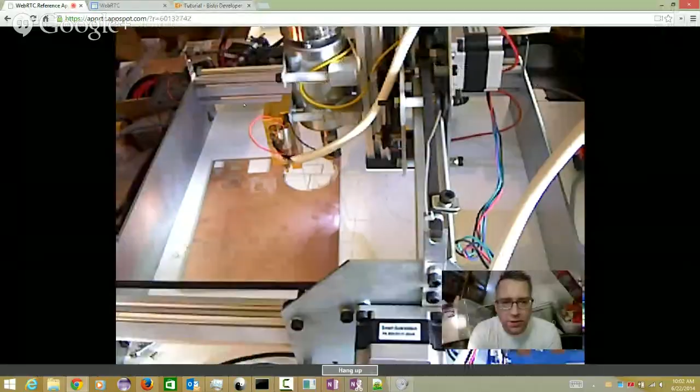Before we connected, I was trying to get this WebRTC live streaming video going so I could watch my CNC device in the ChiliPeppr view. Oh, sweet. Nice. That's looking pretty easy to do. So it'd be kind of sweet. I've got a USB microscope hooked up to it as well. You can see this is the machine that I've got hooked up to it right now.

Oh, cool. Whose 3D printer is that? It's a CNC machine. It's an Othermill. Oh, yeah. That's the one that's got the TinyG embedded in it, right? Yeah. I use that because they had all of the limit switches and whatnot already put in there. Nice. So they may actually appreciate this ChiliPeppr project. Yeah, the app that they write only works with Mac. Yeah, that's the thing. Why are people doing desktop apps still? Unless they didn't think the browser could handle this. I think the browser does a better job than a desktop app.

The only thing I'm really curious about is these faster machines. This is pretty slow right here. It's great for what it does, but even like the Shapeoko, or the 3D printer that I made, I can get it going at like 55,000 millimeters a minute. That's huge, really fast. So you're saying it's going to starve the planner buffer. It could. I don't know. I'm curious to see.

But you know what you could do? This is the perfect thing for this video on how to extend, because you could be sending blocks of like 40 lines at a time instead of what I'm doing, which is just piecemealing it. And I add like a 100 millisecond delay between each line. Oh yeah, we got to get rid of that. Because the one thing about JavaScript, or at least the way I wrote it, is that it's event based and it's one thread. So you almost have to give it time to process other events.

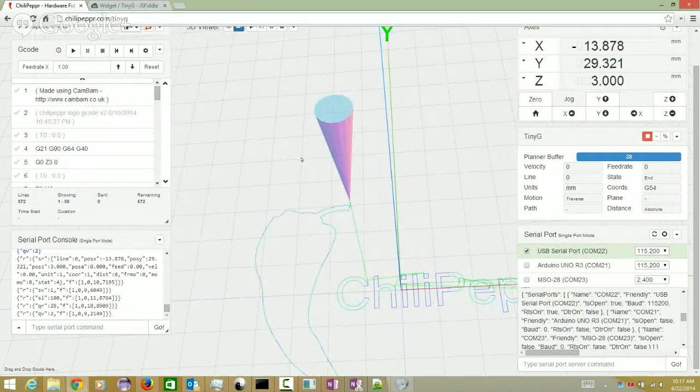Hey, I'm back, John. Okay, yeah, I'm back. Hey, cool.

So yeah, you're absolutely right. You're at the operating system's mercy, which is kind of cool and kind of terrible. Kind of cool because you're not going to overflow the buffer. Kind of terrible because you lose the ability to pause and resume. So it would be interesting to pull that 100 out and just say send the file. Don't do anything. We'll lose the ability to pause, but that's what the QRs are supposed to be for.

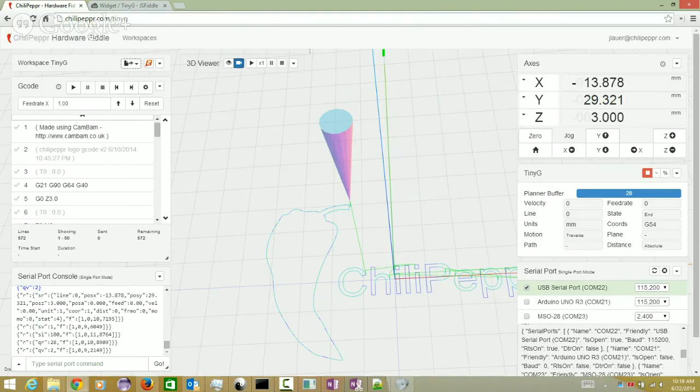Right. So basically, it will never be any more than whatever our high water buffer is, like 18 moves into the planner or so, before we're going to do a pause, which is emergency stop and all that stuff. There is no such thing. It's actually just stop. Emergency stop is always just to hit the power to the motors, right? Right. Which we've all done.

Right. Well, I feel like maybe that's more of the design decision you guys have to make for the TinyG itself. I'm just going to work with whatever you make available, and I do think the planner buffer is pretty good, and I feel like you could do a little bit more intelligence on the G code sender. I've got to do something anyway, or maybe somebody else will, where they analyze each line of code and see how far the movement is to estimate the duration of the job, and you really have to do an estimate per line.

And not even that. It's about velocities too. Well, but that would be part of the estimation, right? If you're doing a 100 millimeter move at a 10,000 millimeter feed rate, it's going to go really quick versus a 30 millimeter rate. But you're still getting drift on that, because it's a lot harder than you think, because you have to take into account your maximum jerk and your acceleration and deceleration settings. You could estimate that part. You could, but it's not going to be exact. And if you have a 2-hour job, you're going to be off by quite a bit at the end.

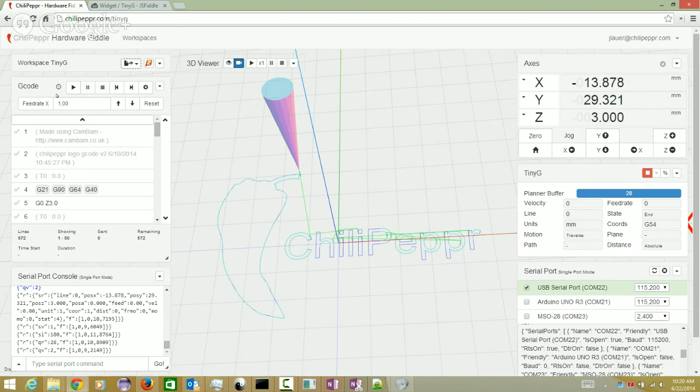You will, but I do think it could be enough to make you decide in the code to send a block of 5 lines or 10 lines instead of just 1 line. How would that influence how many you sent? I'm only sending one at a time with that 100 millisecond delay. But why do we care at all about the size or whatever? Why wouldn't we just go by the planner? I think it's still in tandem, but if I run this job right now, you'll notice here. I'm going to go ahead and run it.

So notice the planner buffer's down at 11. Are you seeing that? I am, yeah. Okay, these moves, when I'm in G2, G3 moves, those are chewing up a lot of the planner buffer from 1 line of G code being sent. So I'm actually okay on those. When I have these long, straight G1 moves, I could feed more data into the planner buffer to just queue it up.

It's funny, this bar has an animation attached to it, and the animation is not running because there's too much processing going on because of this Google Hangout. Let me turn off this console just to save some processing.

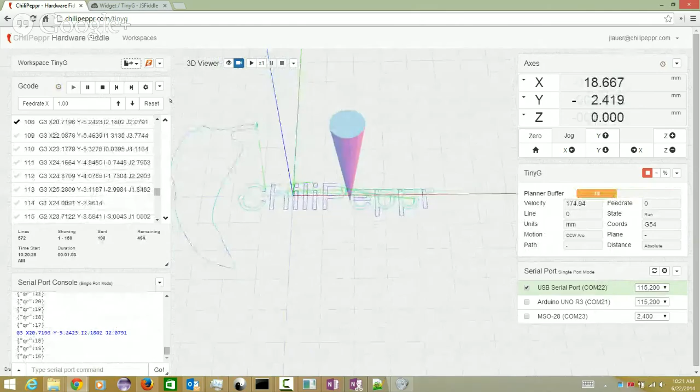But when I get over into this actual ChiliPeppr section, I have a ton of those short moves. And I end up with the planner buffer lingering around 26. I'm not sending enough to it. That's because your 100 milliseconds is delaying you. It's too slow then, right? Right. So that's what I was trying to say, that's going to get you. But I could send 5 blocks of data when I'm in that section of G code. Whereas this section, I think I'm fine. I mean, it works pretty well.

So I guess maybe you don't agree, and this is why we're having this talk here. But anytime we're doing anything with delay, we've already lost, because delay is kind of a band-aid in my opinion. That's kind of the way I looked at it when I started doing this.

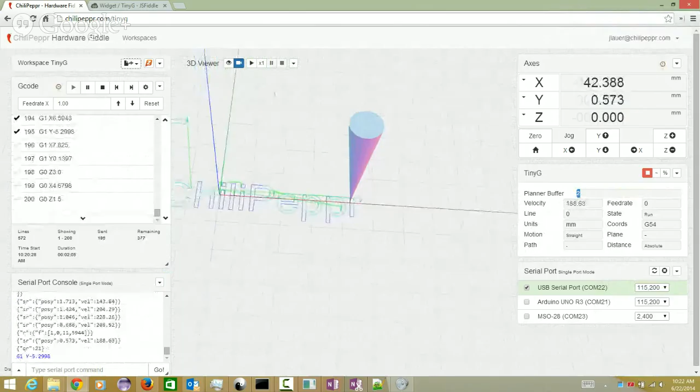Also, one little comment I'd throw in here: I've taken notes about what we need to work on, which would be to be able to tell when you're actually connected versus pseudo connected. You know what I mean? Because your test serial port console runs a lot of the time, and you see stuff happening, but I think the average user doesn't know it's not connected. He says send line, and it just doesn't. There needs to be a better, clear indicator that it actually works.

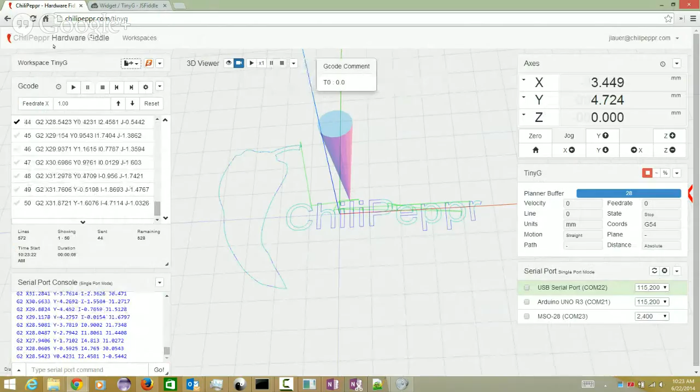You know what? It does throw up an error though, on that note. So if I disconnect. Right, but now click the 3D viewer and click play. I mean, of course it's playing the commands, but there it is: we couldn't find the serial port you're trying to write to. Right, but I'm still writing a whole bunch of lines, and I'm like, oh, it should be working. What's going on here? Yeah. It's just a little confusing. I know that you get it, and I know that I get it now. I'm just telling you what I got confused with.

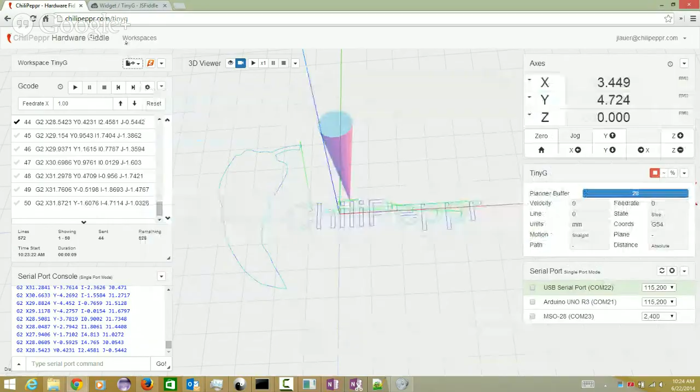And the other problem is if you switch to 3D viewer, you're just running a simulation. Right, that's the other one. Because at first I was just using that one because I didn't know what I was doing, and then I was like, oh, why isn't it moving? This is weird. Yeah, so that probably does need to be a little bit more obvious, and maybe an indicator here that some reading and writing's going on, like the way your phone shows you up down data. I don't know how to fix it, but it's almost like the 3D viewer has a play button next to it and a stop and a pause, and then there's a G code stop and pause, and that's confusing maybe a little bit. Yeah, I thought that was confusing early on too.

It's almost like this should say simulator right here instead of 3D viewer. Yeah. Or simulation, or something. But then again, it's not a simulator when it's getting feedback data from the TinyG on the XYZ. It's just showing you a real view. But hmm, maybe you actually break out that play button and the stop and the pause and the 1x thing into another widget, and you make a simulator widget. Yeah, that would work.

And I think that is good feedback once other people start using it, because when you're putting this together as a little weekend project, you just kind of whip up some JS fiddles and see if it works. No, dude, again, I'm not complaining at all. It was definitely a lot of on the fly design. I'm just telling you that I got pretty confused with a couple of things. When I compare it to the Mach 3 interface, I feel like this is just light years beyond the way that interface tried to lay everything out. Right. It is a lot of decision making.

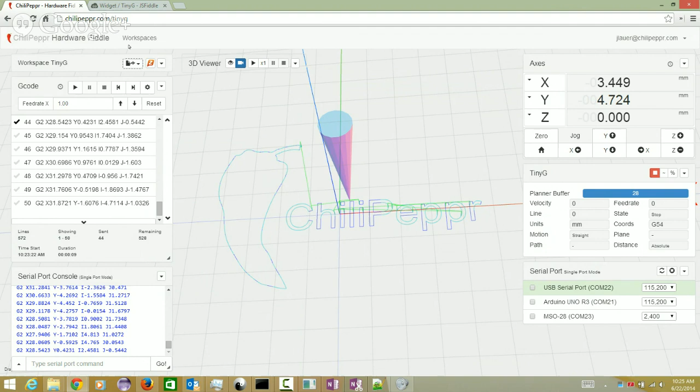It is. So, anyways, getting back to Braid, what's the smallest Braid that actually could fit on my ShapeOko layout? Do you have like a 150 millimeter one? I think those are all speed 100. Those are speed, not size. They're all the same size.

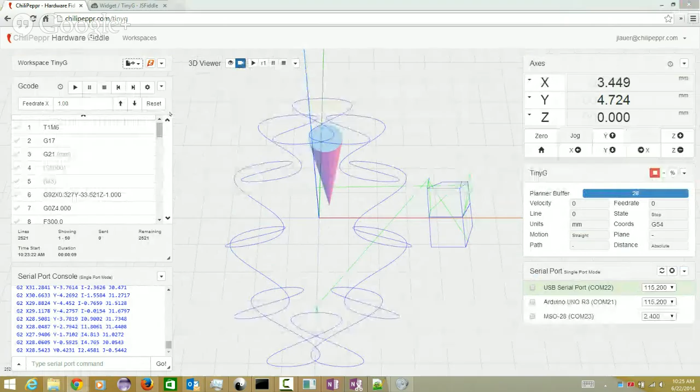Why is it 300? Oh, 300 millimeters is the feed rate. That's 300 millimeters a minute. I got ya. So I usually do an 800, and that's a pretty good test. I mean, obviously the Shapeoko is going to be able to haul about like the 2000, okay.

Well, what's funny is I could just do the feed rate adjust on whatever of them then, right? Oh, you have a little feed rate override on there. Yeah, so see how it goes blue when it's adjusting the feed rate. Show that again. See, when you adjust the feed rate, it changes the F's to blue. Are you at 1.5, the multiplier? Is that what it's doing? Yeah, so see this one, it was at 800, now it's at 1200.

I'm gonna make a note on that real quick, because that feed rate X. I'll do feed rate override. Yeah, and you can do that on the fly as you're sending the job. So anything after that that hasn't been sent is going to be multiplied differently. That's correct. It's definitely not sending some feed rate adjust right to TinyG on the fly. That would be cool, but which actually makes it even harder to do time estimation once you change that. Yeah, exactly.

Okay. Well, that's cool. So give this guy a shot and see what kind of actual movement we have on your Shapeoko. Okay, now I'm a little worried. Let me pull up the video feed, because I'm not in the same room as the CNC machine, which is why I want this video feed. No, I know. So what is WebRTC? Yeah, so WebRTC is just a really cool in-the-browser video stream.

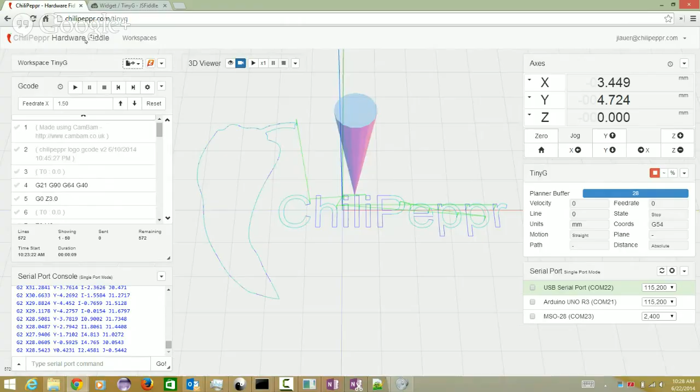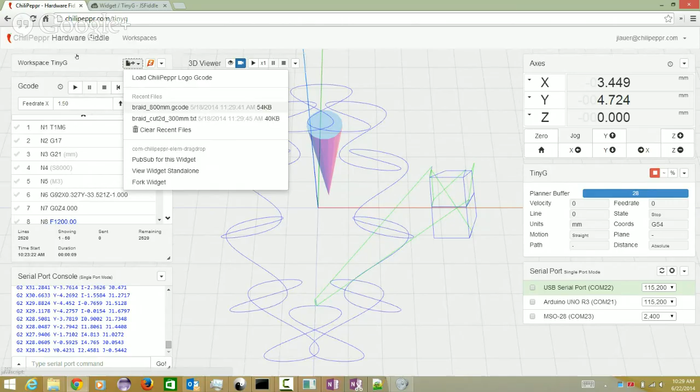Where's the recent files? Maybe I can't see. The recent files is up where the drag drop icon is, and now you can see the recent files that you brought in. Oh, cool. It doesn't hold a lot. The browser only gives you like 5 meg of local storage. Oh, that's local. The HTML5 storage. Exactly. Okay, so I'm going to go ahead and run this now.

Let's see what happens. Oh, I'm not connected. Right. So when you do that, I think we should actually throw an exception and stop. Well, it could, but if you're running a simulation, you don't want to. You're right. There's a couple better ways to handle that. I'm just trying to take notes about where the confusion's at. All right. Here we go. Okay, so it's starting to move.

So I think watching the planner buffer is going to be the most beneficial here. And I'm only up around 20. I'm starving it right now. Right. Being up by 25 is actually a bad thing. I'm just saying that for the audience. Yeah, and I don't know if you can hear it, but it's definitely getting starved. So this is where if you're estimating how tiny these moves are, you could say, okay, I'm going to send faster or I'm going to send bigger blocks. So it's definitely starving it.

And so if we saw your video, do you have a video of your guy running right now? Can you switch to that? I could probably pull one up. Let me, instead of using WebRTC to do it... Actually, I could do WebRTC. If it's easy, cool. If not, don't worry about it. I was going to say that what you're going to be seeing right now, for everyone else, is this thing's going to be stuttering. And yeah, it is definitely stuttering.

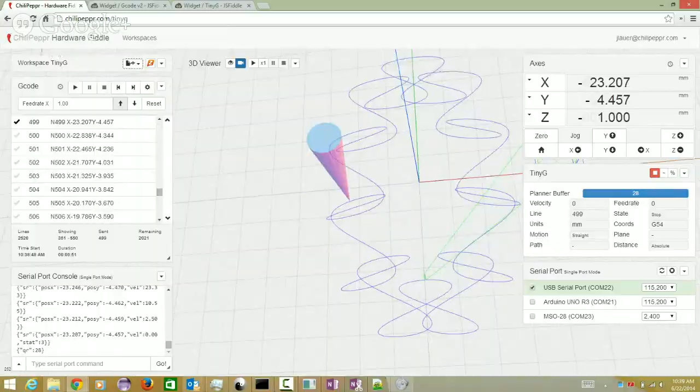Now go send the one that is 18,000 millimeters a minute. Okay, so do the same thing - stop this job and set it at 0. Set it at what, 0? The feed rate? It won't move at all. No, the delay. Oh, the delay.

Okay, so as long as flow control is accurately working, it'll work perfectly. Well, even at 0, it is still gonna loop - I gotta give it some time to yield. If I do 0, there's not going to be any time in the single thread of the JavaScript to process pause commands.

Basically what we're showing you is flow control in the operating system on your Windows machine or your BeagleBone or whatever you're doing. You gotta understand, but what I'm at the limits of JavaScript now - I can't, I'm still in a JavaScript environment.

I'm gonna set it to 1 millisecond. Oh, you can do 1. Yeah, that's fine, because I just know how JavaScript runs and how this app works - it's just in one thread. Right, but show us the output of your machine though. Well, here, really quick, it's on 1 millisecond - watch what it does. I got 572 lines.

And if it were able to run as quickly as it could, it takes the durations right here - that's 8 seconds to send them all. So that's pretty fast. Let's reload. Your operating system is going to be buffering all that, so you're going to send a crap load of stuff right off the bat. In 8 seconds, you're going to send this whole file, or whatever it is - not the file, but what you did. And then you're just going to be parsing responses. All right, let's go.

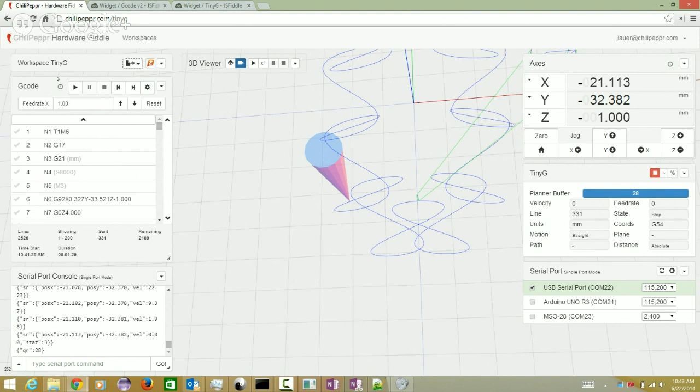Well Riley, you can fork any of this and play with it. I will, I absolutely will. I just wanted to - I think your experience too on all the other stuff you've done is going to be invaluable to figure out the best formula. I do think because we're in this browser JavaScript environment, we've got some other stuff to deal with. Yeah, I'm still, like, I know we discussed it briefly - I still don't think that sending directly from the browser is the best way to go about it.

Yeah, sure. I almost think - I mean I really like the idea of uploading the whole file to the Go server, and then once the Go server gets there, it just listens for certain things. So the Go server is actually the guy that monitors the - I mean, in my opinion, this is how we should do it. Let me know if there's - yeah no, I like where you're going with it. You just got to put a lot more complicated code in the Go server. You basically do the QR tracking inside of Go.

Yeah, everything else is fine - you leave it alone and do whatever you want to do. But you do every - so at that point it's agnostic to like whatever. It's like I'll send it, and the Go server is going to make sure that the QRs are getting parsed, and it's never getting outside of that. And you've got your multi-threaded environment right in there. Yep. I actually haven't looked very much into the Go code at all - it's a lot of threading. So Go has something called channels, which are really just threads, and they're super easy to use, and it's native code, so it's fast. It really is a great place to do it. And then, yeah, you're just sending JSON updates back to the browser, and it's way less work. I think it's cool - you could just upload the whole file to the serial port server, and it either puts it in memory or it puts it to disk.

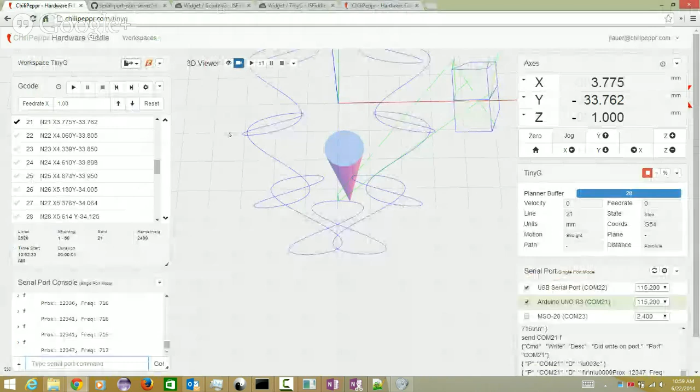I was actually thinking about looking at doing an ACE editor for the G code. Have you looked at ACE? I've seen ACE being used a lot out there. I don't know, I was just curious if you looked at it.

I think my server died. Are you going over the network? Yeah, I'm finding that there's some...

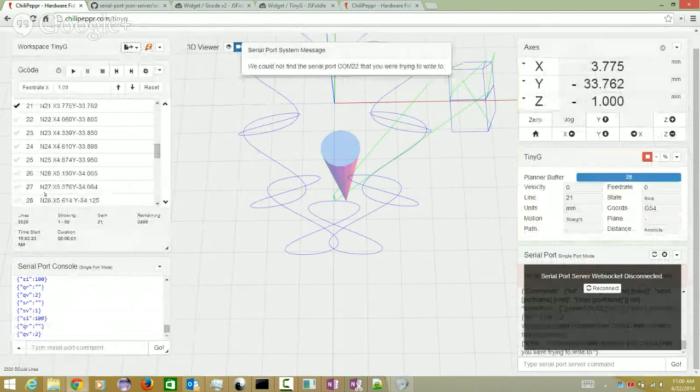Shoot. There are some bugs in the serial port JSON server right now where if you open up the port and you send a command too quickly, it'll crash. And I think it's just some of my cross-threading stuff. So that's going to need fixes. I think I just crashed my serial port JSON server.

On the bright side, I have got it working on the BeagleBone, and it works really well, so good. I'm really stoked about that. Yeah, that is pretty awesome that it just worked without any real testing. Yeah, no, there wasn't a lot to do.

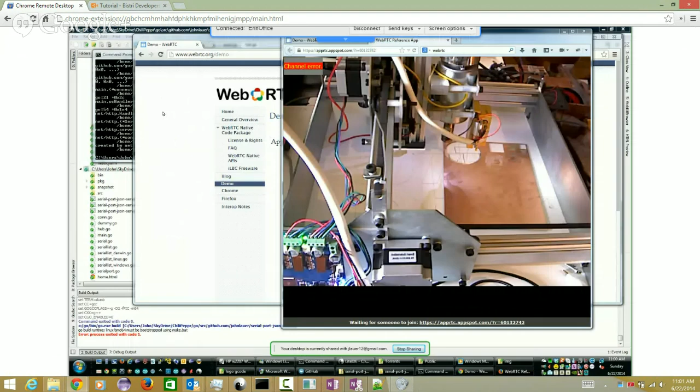So, okay, how do we handle the TinyG and delays and the QRs and whatnot? That we talked about uploading the file possibly. Yeah, and I think what you could do if you want to play around with that is... I'm just trying to recap, take notes. You could pull down the source code for the serial port JSON server and just go in there and muck with the idea of uploading the whole file. And then I would just figure out a standard WebSocket protocol to give feedback on which line of G code you're on.

Or you can try and do it in a generic way and just call it a serial port command upload, where you're uploading a list of serial port commands. Whether it's G code or custom commands somebody invented for their laser pulsar, it's just sending back which line it's working on. Almost like you abstract the two, because you want to be able to send a G code file. I don't want to be able to send generic TinyG commands in.

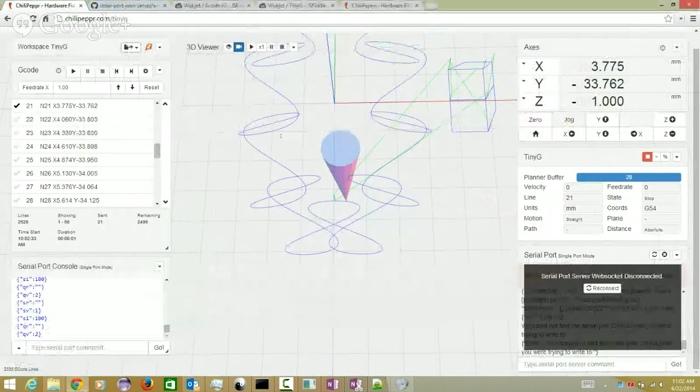Right. It's almost like an abstract method of send a G code file, and when I do that, it starts an upload, gives me a little UI, says it's uploading it, and it's ready to go, and then we can do it all there. Because you wouldn't want to be able to send... There's problems with TinyG V8 and below, not problems but architectural problems.

You can't send like 42 settings right in a row because it freaks. We have to disable the interrupts and then write to the EEPROM. This is the XMEGA limitation, it's not our code. And then bring it back up. And so the only time I've ever implemented delays is when you're writing a config string. I say wait 100 milliseconds, and then send another one.

Yeah, and anytime you're writing code where you're putting artificial delays, you start to worry that it's a half-ass architecture. But sometimes it's just necessary. I have artificial delays in here, and I'm not happy with it. When you connect to the serial port, I artificially delay sending these setup commands to solve the port server crashing. So it is what it is, these are just weekend projects, you just got to get it to work, and it's working. I'm sending real jobs now, and I'm really happy.

But this is the kind of thing that we document, and then we start saying, "Hey, we have a weekend. Let's figure out why it's crashing." Yeah, absolutely. As long as we can document these and keep going for it. So I'll take a look at the Go code to see if we can't upload those files.

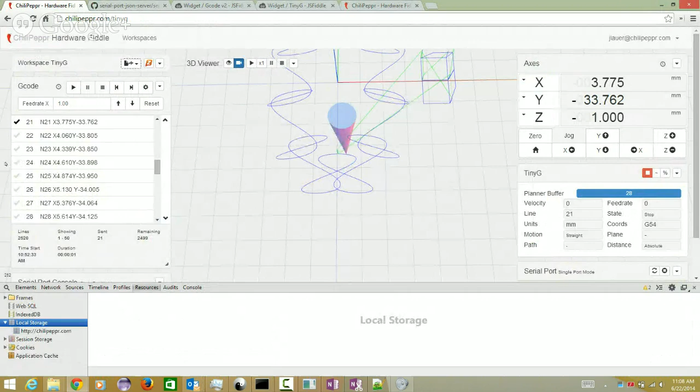Yeah, but I'm just saying that input file upload. Right, but I'm saying since you have these line by line, you would have to just do a bunch of posts. Or a large post? A post can actually be, I think, an unlimited amount of data. These are, by the way, the local storage values, the last imported file or the recent.

Why can't we throw it through WebSockets? Yeah, you could do that too. You could just sort of stream it up and just append some kind of URL to it. Yeah, you could do that too. I know it's kind of breaking your architecture that you're talking about. No, I think that's okay to add like a file upload to the WebSocket. Like a put command almost over WebSockets.

Yeah, because if you go back over to this, I guess is it in my hub? My check command method is probably actually in serial. It does sort of break the model a bit, but that's all right. So if it gets us out of the delay land, it might be worth it. Yeah, maybe it's in my hub. Yeah, here's where it kind of processes the commands coming in. This check command.

The funny thing is when you're interacting with the serial port JSON server, you're sending non-JSON strings as commands, but you're only receiving JSON back. That doesn't have to be that way. I just did it to keep things simple. It's the same way I'm doing the TinyG. I'm sending the G-code commands not as JSON, but I'm expecting JSON back. So it has a list, it has a send, it has a close.

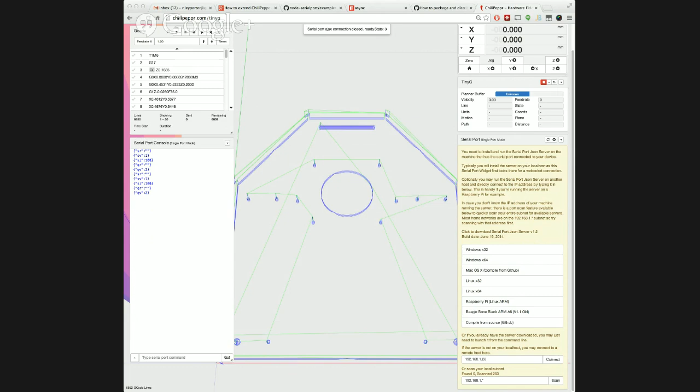Okay, here, I'm just going to use the arrow keys. Let's make sure that worked. 39. I'm starting the server now. No, it didn't take it. Okay. Scan. Good to go. Found it. All right. Cool. Hold on, I didn't get the right piece of code. No, I mean I've got all my stuff up now, and it's working. Oh, sure. Okay.

It's so cool being able to just connect this machine. I've got a touchscreen BeagleBone Black that I can just start up, turn on the JSON server, and then load up locally. Yeah, it's really cool. So I can load up ChiliPeppr inside of the same machine that's sending it. That's sweet.

Okay, so I'm going to change the base val. Okay. That should work. Cool, I got that going. Now if I hold down Shift. Yep, okay, so update, set as base. Okay, if you reload TinyG now, you should get much quicker jogging. All right, give me 1 second. Let's see. Yep, there you go. So just don't do any accelerator keys.

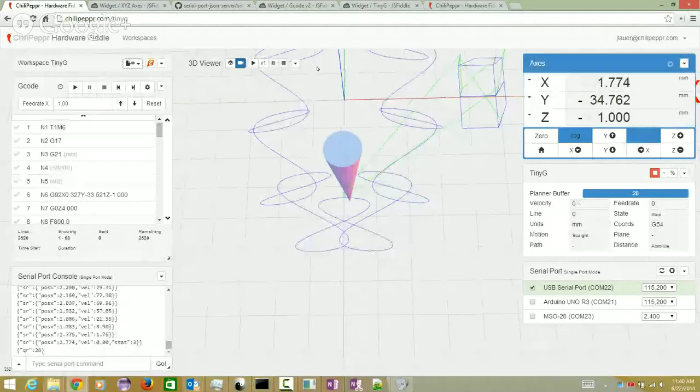Yeah, well, I just did Control R on the Hangouts because I saw your screen and thought it was mine. No, that's hilarious. Yeah, it was like, oh no, I just did that, didn't I? All right, so let's see. Can you see my screen now?

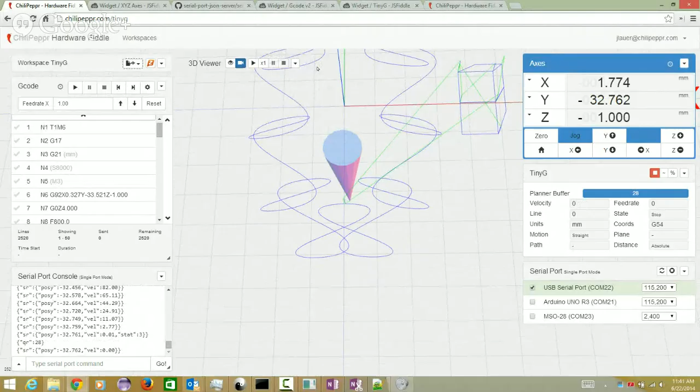Let me see. I do think your technique of sending a long command and then sending the exclamation point is better. It scares me a little bit because I really did run into problems with that in TGFX, where it would run to the edge of my...

So what do these buttons do? They just jog. Go ahead and try them. Just hit it once and you should get it moving 1 millimeter. All right, there you go. So it's on mouse release, right? Only when it's blue is it in jog mode, where the keyboard arrow keys work. Otherwise, just hit the jog button. Where is it blue? You mean right here?

Oh, this. Yeah. Okay. All right. Now you're in jog mode. Okay. So only when it's blue. That way it's not dangerous. I will say in TGFX it was hard to get it into jog mode, and then sometimes it stayed in it and I forgot it and I'd screw stuff up.

All right, so that's much faster. Oh, but I'm just like slamming. Right? See, it overdoes it though. Right. That's why I'm saying I think it's better to go the other way, where you hold it down, you give it the max, and then when the signal comes up, it sends a stop reset. Yeah.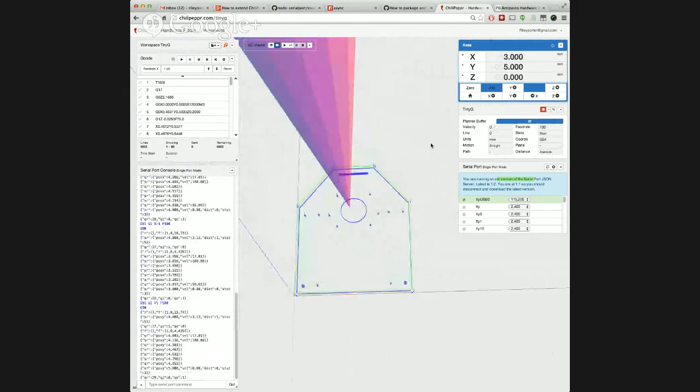Yeah, see, I didn't think about doing that until you mentioned it, because that just doesn't feel like it would work on stuff like Grbl or the Grbl shield. Oh, I mean, if you're trying to do that compatibility, I think a lot of the stuff wouldn't work. That's why I kind of took more of a generic approach initially, but I don't mind making changes to make it way cooler and slicker for the TinyG. Yeah, it seems to be working much better now. Yeah, I mean, I've been just doing Control Shift to achieve what you're seeing right now.

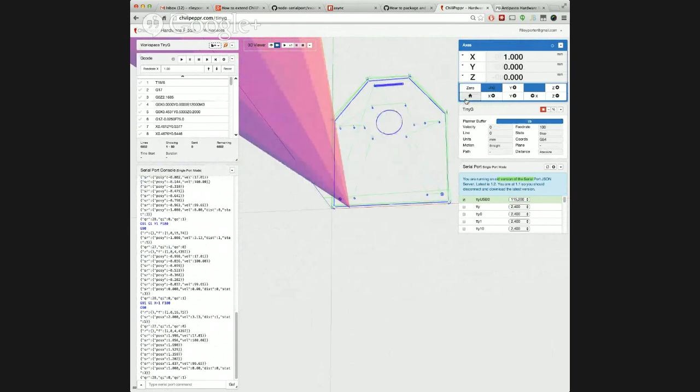What do the home buttons do? Okay, so the home button, that one is not linked up yet, but it would put you into the homing mode, the G28.3 or whatever. Or G28.2, I forget what the homing one is. The 0 does the G28.3, but you can also do that per axis if you use that little pull-down menu on the X, Y, or Z. But what if I want to set that to 0? For each axis or for all of them? No, where my position's at right now, that's 0. So that position is read from the feedback from the TinyG.

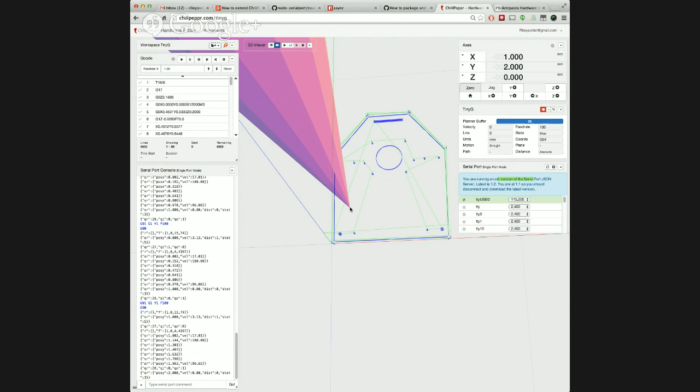The way TGFX works is I can right-click anywhere on my build volume platform, or obviously you should have another button that does the same thing, and say set position here, and it will basically set all axes to 0 at this spot right here. It's kind of like a poor man's homing. Well, if you hit the 0 button right now on the axes widget, it'll do what you just said. No, it moved it back down here. Yeah, okay, I get what you're saying. This is not a big deal. I'm just telling you this is the way I've actually had it working.

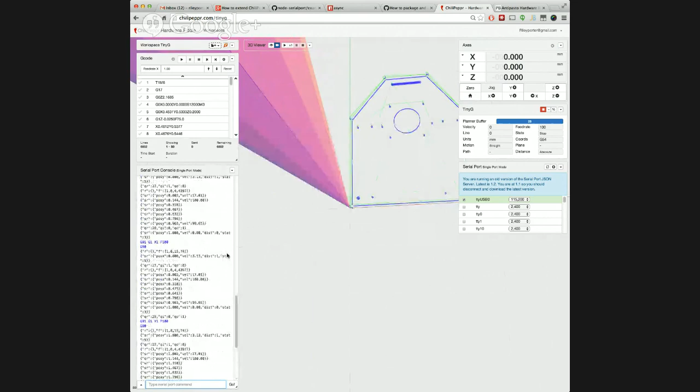Actually, what command did it send when you hit 0? It did the G28.3. Yeah, but it didn't take the offset to where you were at. So you're basically putting it into like a work coordinate. So let's say it's there. Okay, so 2 by 2. Can I send commands here? Yeah, absolutely. G28.3 and then X0 Y0. Huh. It's moving it back. Well, remember the 3D viewer knows what 0,0,0 is. Oh, wait a minute. Hold on. Let's do this again.

So it feels like you're trying to make, I don't know. X2, Y2. There you go. That's what I expected it to do. And then 0, but it's not. Your G-code would have to change. No, the G-code origin is at 0,0. You're setting offsets. It's going to set offsets inside of the model itself of TinyG. Right. So this is an area where I did not put a lot of energy yet, that whole work coordinate system.

That's okay. Hey, let me give you a call back, or we can do this in a minute. My wife just walked in, and she's going to take him to the pool for his dive meet, but I'm going to be here. Let's take a break because I gotta go grab some lunch. Yeah, just give me a call back, and let's talk a little bit more. I would like to hash this out. I'm going to be here this afternoon to start looking at some of this stuff. Okay. Cool. All right, man. Talk to you later.